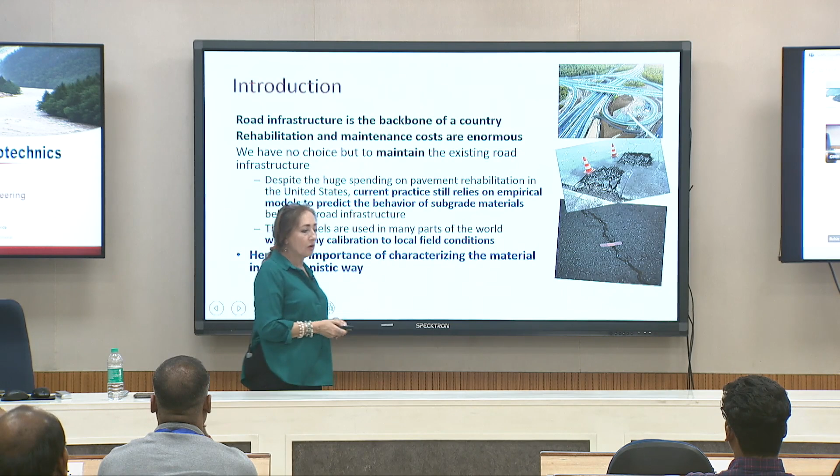We have to spend that money, and despite this huge spending on road rehabilitation, the current practice in the United States and in the whole world relies on very empirical models. Empirical means you may get something fundamental below that, but you get a few points from your area, put a line in there, and use it like it were the holy grail for the whole world. Empirical models for the behavior of subgrade materials are very widely used.

So if you go to the pavement engineering side, where we're trying to do all this geotechnical engineering grade modeling, pavement engineers often don't pay attention to the subgrade. They put a low value there and design for the worst case scenario, the worst case condition. These models are used in many parts of the world, and that's the problem, because once you calibrate a model with certain conditions, everybody else uses it without calibrating for local conditions.

That's a problem, so it's important that we characterize the material in a mechanistic way. What I mean by mechanistic is that it should be a model applicable for everything. Then you get your data and evaluate the model based on your own data, your own soil properties. The fundamental things should be the same for everyone, not just an empirical model.

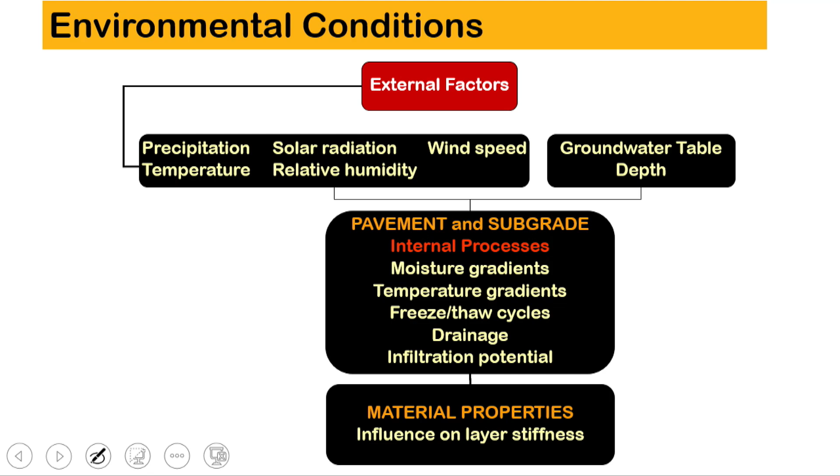So environmental conditions play a very important role in material characterization of stiffness. All these external factors—we talked this morning about precipitation and temperature a little bit, but also solar radiation, relative humidity, which is one of the main factors for suction, and groundwater table depth, wind speed—all of them are external factors that affect the pavement and subgrade conditions.

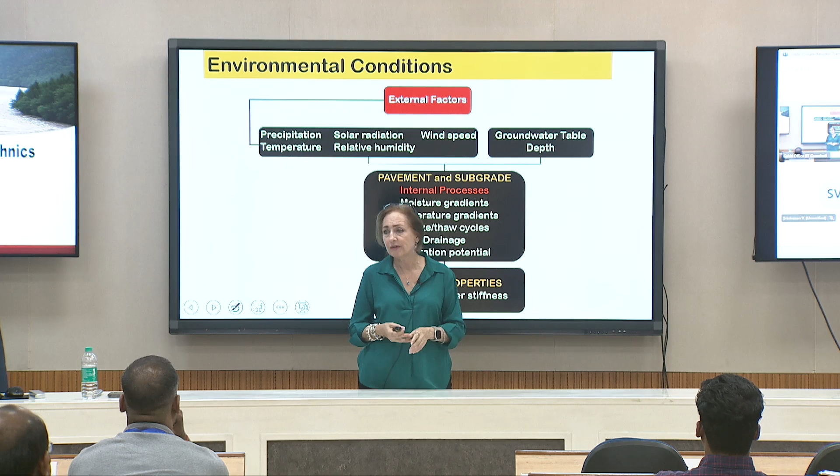All these internal processes that happen in the pavement are a function of some of these environmental conditions, not only the load that you're putting there. So moisture gradients, temperature gradients, freeze and thaw cycles, drainage, infiltration potential—all of them have to do with environmental conditions, and all of them affect the material stiffness of the soil.

It's important. So why is it important for pavement engineering that I take care of the material's stiffness? We put together a climatic model, and that climatic model takes care not only of the moisture variation within the profile, but also the temperature variation.

Temperature is important—probably not for some applications, but for others, when you have freeze and thaw cycles and thermal cracking, temperature becomes a very important mechanism. So temperature distribution within the layers, depth of frost and thaw penetration, freeze and thaw cycles, change in moisture and suction, and the environmental effects you saw this morning, with adjustment to the resilient modulus factor—all affect the main distresses for which we design a pavement system.

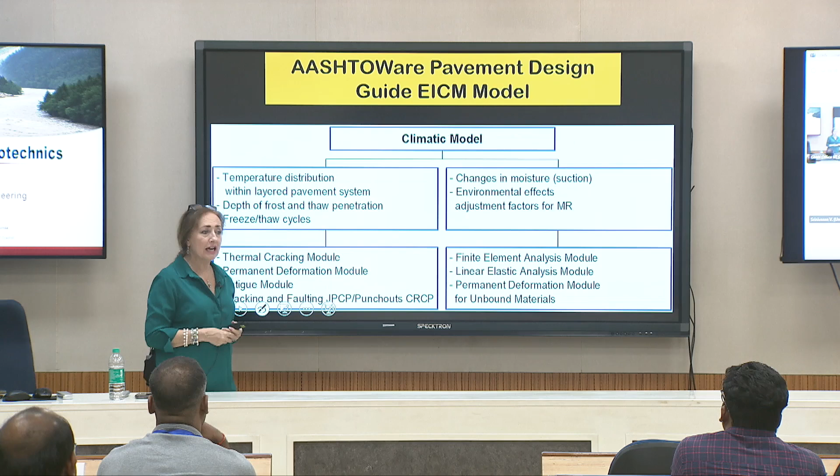I need you to understand that we do have very discrete analysis when we design for bearing capacity for a foundation. We just have a number, right? Or slope stability, we get a factor of safety. Pavement analysis is different. Pavement analysis is a cumulative distress analysis, okay?

The way pavement engineers, and I'm not one of them, do it is basically they figure out what is the rutting or permanent deformation with time and figure out how this thing is going to change, and they put a limit. They say, at this time, my road needs rehabilitation or fails, okay? And same thing for the rutting analysis, they do it for thermal cracking, permanent deformation, fatigue module, cracking and faulting for concrete pavements, and all of this.

So it is a function of time. It's a function of time, okay? And you decide what characteristics you're going to call failure or not. We can do finite element analysis, linear elastic analysis, and we have those permanent deformation module for unbound materials, and all of these are going to be a function of time, okay? And time is going to be a function of your climatic changing conditions, all right?

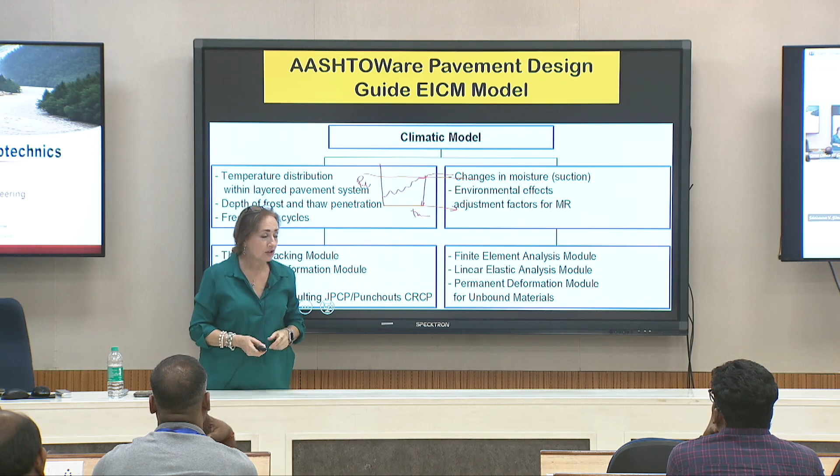So if you have the rutting going like that, the rutting is a function of resilient modulus, right? The resilient modulus is going like that. When you have a lot of rain, your resilient modulus is going to go down. So that thing is going to go down a little bit and run parallel to this one, right? So when you get resilient modulus decrease, you get rutting increase, right? And you're running here.

So all of these will add up with time for the decision that you're going to take, whether it will fail at 18 years or 15 years, right? And all of this is money. So that's how it works. That's a very simplistic approach, but this is how we do pavement analysis and design. On top of that, we add slope stability or road embankment stability and some other factors, but this is basically what we do for pavement analysis and design, okay?

So what we're going to learn today is stiffness characterization, why it's important to be very clear on how to obtain that resilient modulus. I'm going to show you some laboratory testing that we do for that, some field testing, and some empirical correlations if you have a proposal that you have to put together in 3 days, right?

So there are 3 means for determining the resilient modulus: laboratory measurements, field measurements, and empirical correlations. So we're going to go for laboratory testing right now, and basically what you want to do is simulate traffic loading, okay? And the test we do is based on some measurements that Seed from California, Berkeley, I believe, and his group postulated in the 1960s.

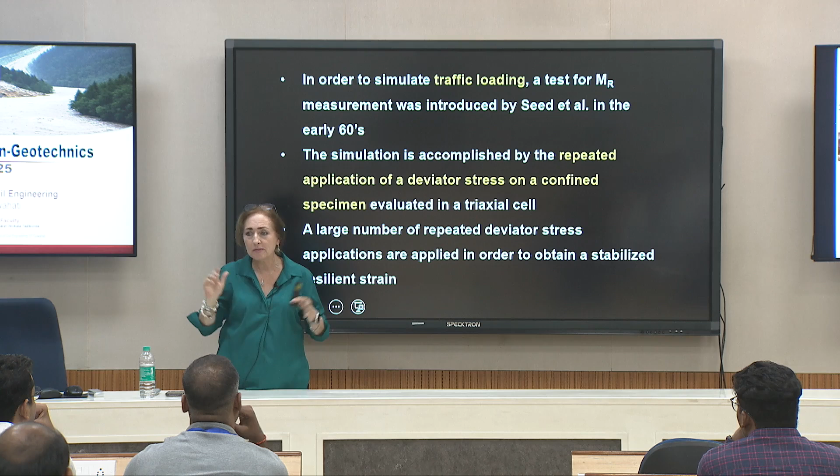That simulation is a repeated application of a deviator stress. Everybody knows deviator stress, sigma 1 minus sigma 3, right? That's put on top of a confined specimen. So we're going to see that in a minute, evaluating in a triaxial cell.

Okay, so you have a large number of repetitions. I'm talking about 10,000 repetitions, right? Each one takes 1 second. In 3 hours you can get the test done. And basically, you change the conditions after a certain number of repetitions. So I'm going to show you how. So this is the test.

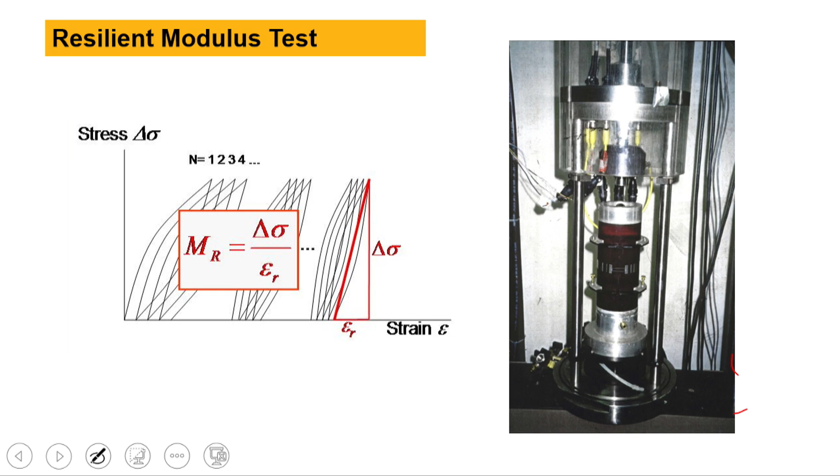So you basically impose, get a triaxial cell, you get a sample. I'm going to talk a little bit about that sample, and basically you put LVDTs to measure vertical deformation and horizontal deformation. And that's why pavement engineers fill these cells with air, not with water. We do it with water, right? But they pour all these LVDTs around for lateral, for horizontal deformation as well, right?

And at that time, probably now there are some submergible LVDTs that are a little bit more expensive, but it's expensive, right? It's expensive to put those. So that's why they confine with air, because they put all these sensors right there.

They start doing loads, low repetition, and do a lot of cycles. Basically, the modulus is your change in stress with respect to the recoverable strain that you get. In other words, you test it, you go up and recover some, you go up and recover some.

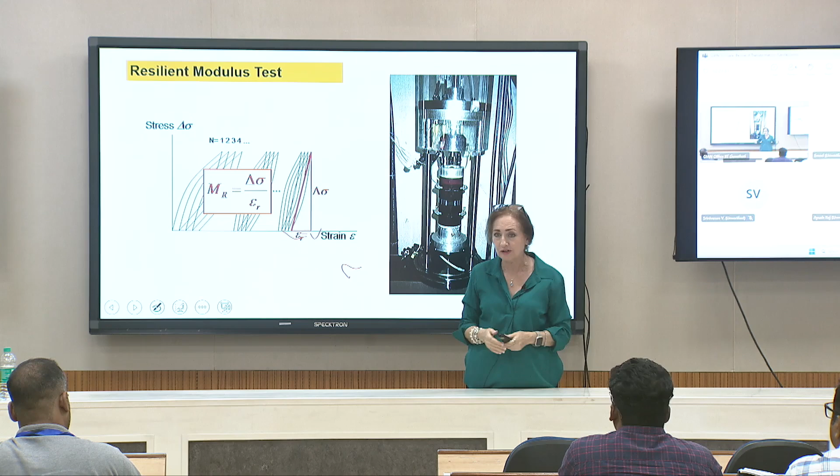After 10,000 repetitions, the soil has equilibrated to that load. On the last 5 repetitions, you measure the recoverable strain, or resilient strain, which is why it's called resilient modulus. You use that recoverable strain to get the resilient modulus for that particular stress condition. Once the strain is measured, the process is repeated.

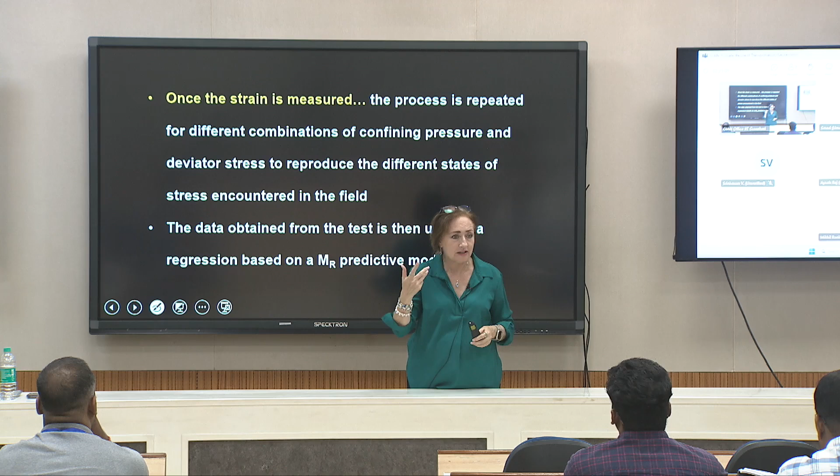The process is repeated for a combination of confining stresses and deviator stresses to reproduce the different stress states of the soil encountered in the field. The data then goes through a regression analysis. You have one confining stress, sigma 3, a deviator stress, sigma 1 minus sigma 3, and you get a resilient modulus. There are probably 28 or 30 different combinations, and you put them into a regression analysis to figure out what your resilient modulus is.

There are two methods that are standard for doing laboratory testing. Have you seen that? Has everybody taken that in undergraduate? Okay, one or two. All right, so there are a couple of test procedures.

One of the most common test procedures used in the United States and in the world is the AASHTO T307. I'm sorry, you may have your own, but I don't have that information. This is called the determination of the resilient modulus of soil and aggregate materials, and it's been used forever.

The latest one is the NCHRP, the National Cooperative Highway Research Program, 1-28A harmonized procedure. I'm going to talk about the 1-28A because I think this is important, and I'll compare it a bit with T307, but I'll be talking about 1-28A since it's essentially the same as the other one.

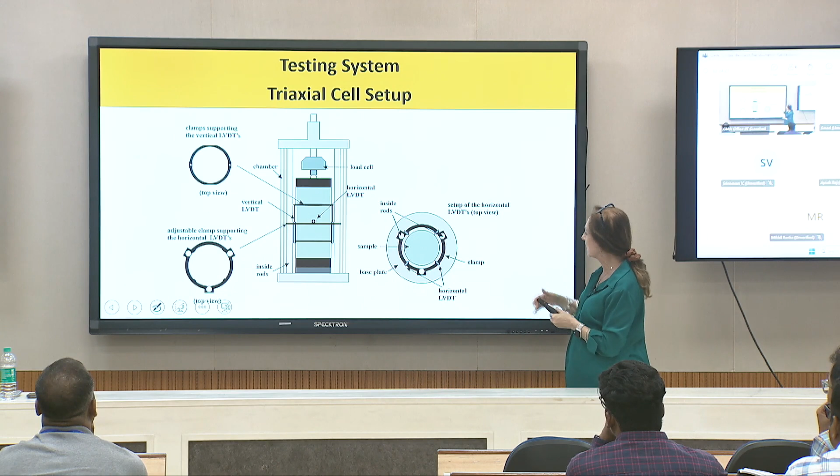So you have the triaxial cell, and like I said, you put your sample in. I'll show you the dimensions in a minute. You put clamps in to position your LVDTs, both horizontal and vertical, and you confine it with air, usually at a particular confining pressure that you need, and then you apply your deviator stress.

For specimen preparation, if you have an aggregate base, for coarse grain materials, you use a sample that's 6 inches, 15 centimeters in diameter, by 12 inches, so it's a big sample. If not, you use the subgrade sample, which is 4 inches, about 10 centimeters, by 8 inches.

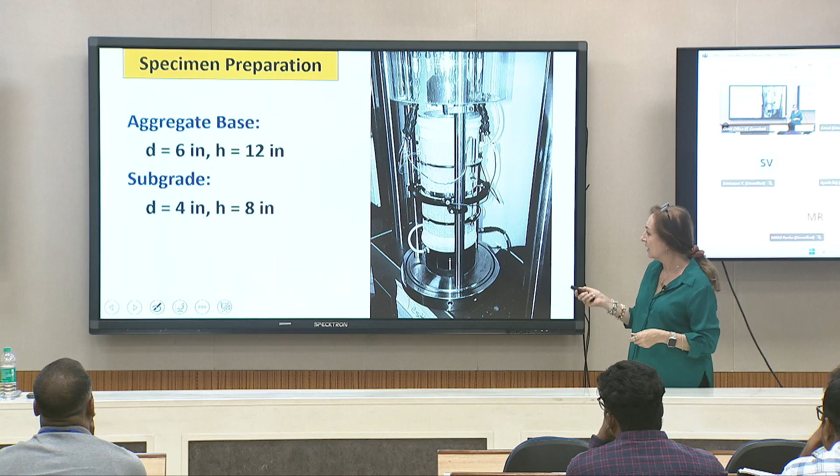So you have to have a couple of loading plates at different sizes, since this equipment has to be manufactured for different sample sizes. Then you put the samples into the assembled triaxial cell.

Then you apply what we call a Haversine load, or Haversine pulse load. When you simulate earthquakes, what kind of load do you use? It's sinusoidal load. For traffic load, we use a Haversine load, which is also a pulse.

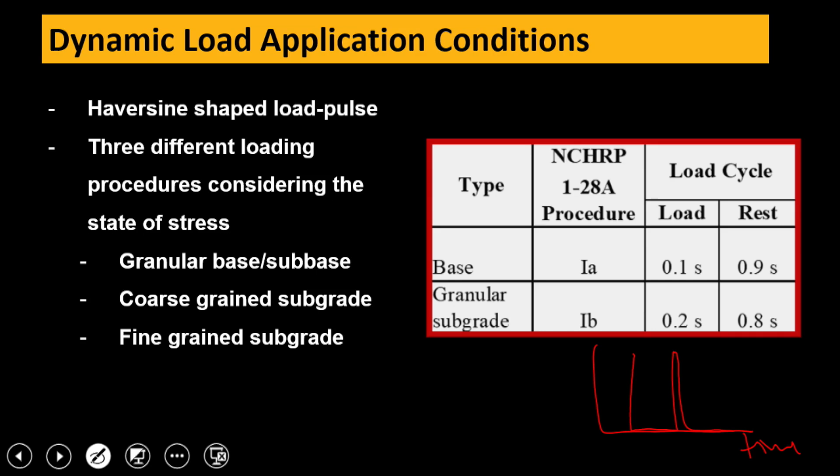There are 3 different load procedures depending on the material you have. You have time on one axis and load on the other. For one pulse you apply load for 0.1 second and rest for 0.9 seconds. If you have granular or subgrade material, you apply load for 0.2 seconds and rest for 0.8 seconds, depending on the material.

This is how we use the Haversine load. You do that once every second for 10,000 repetitions for one load condition, and then you repeat it for another 28 or 30 different conditions, following the sequence of loads.

So how do you choose the sequence of the load? That's very important. You need to minimize the probability of test failure. Why? Because what you want to measure is the resilient modulus of the soil, not permanent deformation, failure, or shear strength. You want to load it to a point where you're not failing the sample, because you're going to have many repetitions on the same sample, so you don't want to fail it.

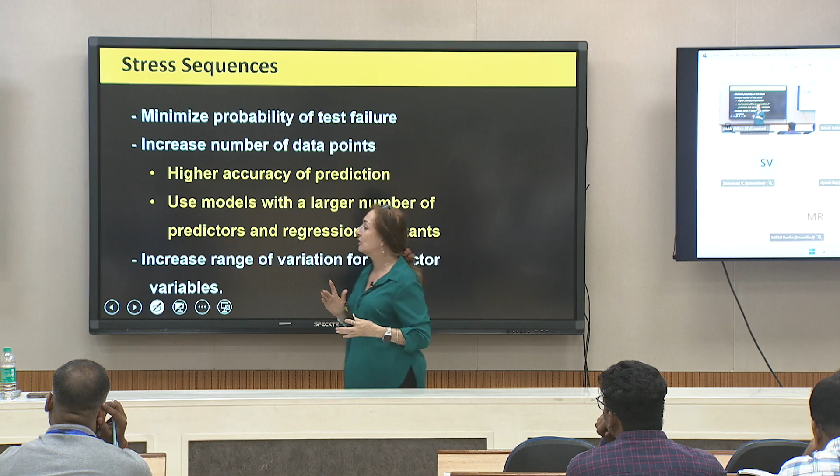So basically, if you check any failure criteria for any soil, that's your failure line for this one.

If you use, for example, the classic approach that we had before, which was the T307, you got a confining pressure in here, and then you start increasing the deviator stress. And you got stress paths that were in this direction.

So what happened is, with the first confining pressure, probably after 5 deviator stresses, you're failing the sample, and you're done. And everybody's calling, why am I failing the sample? Well, because the stress sequence is not the right sequence. You do that for the next confining pressure, and the idea was not to get close to this one, to finalize around here, but you never know what happened with the sample.

So this 1-28A sequence basically uses a harmonized line of constant stress ratio, sigma 1 over sigma 3, which allows you to have this stress path, a little bit more parallel to this. So you are varying in the next sequence not only your confining pressure, but your deviator stress. And that way, you have more loads in here before getting into one that might fail your soil. So this is the sequence that we got.

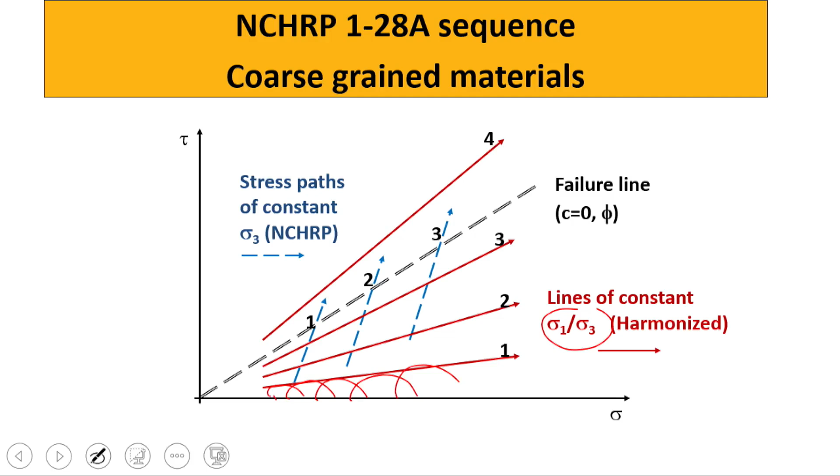And if you have, for example, a fine-grained material, the line of constant deviator stress will do something like that. There were... I thought I took this one out. I'm just afraid that I'm using the wrong one, I hope not. It's too long probably. There are different models.

So you got all this data. You got 28, 30 different sequences, 30 different combinations of loads. And you need to fit this information to a model. Since the 1960s, when Seed proposed this kind of sequence, there have been many researchers trying to find out the best model to represent the resilient modulus conditions. So you then use log models, semi-log, more complicated ones. They use 2 constants, fitting parameters, models all the way to about 6 different constants. They use different predictors, stress state, like bulk stress.

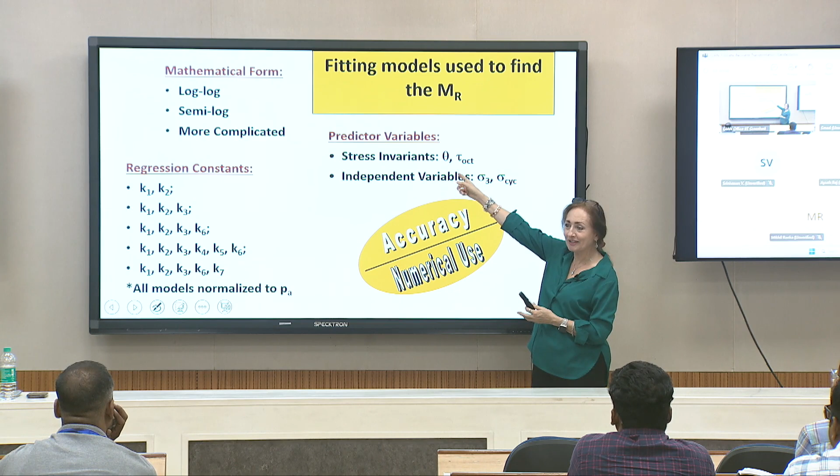And the tau octahedral is 1/3 of the... I think, I hope I remember. Tau octahedral is equal to 1/3 of the square root of the second invariant: sigma 1 minus sigma 2 squared, plus sigma 1 minus sigma 3 squared, plus sigma 2 minus sigma 3 squared. Something like that. So that's the second invariant.

Those are the... so pavement engineering actually uses the three-dimensional thing because they have point loads for these traffic loads. So they use this one, or they use independent variables like confining pressure, cyclic stress. We've been using many, many different models. So which one is the right model? This is just a few of them that I bring in here.

Again, these all have forms in which you include, obviously, the stress, and the response is the resilient modulus, and the K1, K2 are the fitting parameters that are a function of your material properties. So those are many, many models proposed in here. What I want you to see here, very carefully, is to see if you catch the problem with these models.

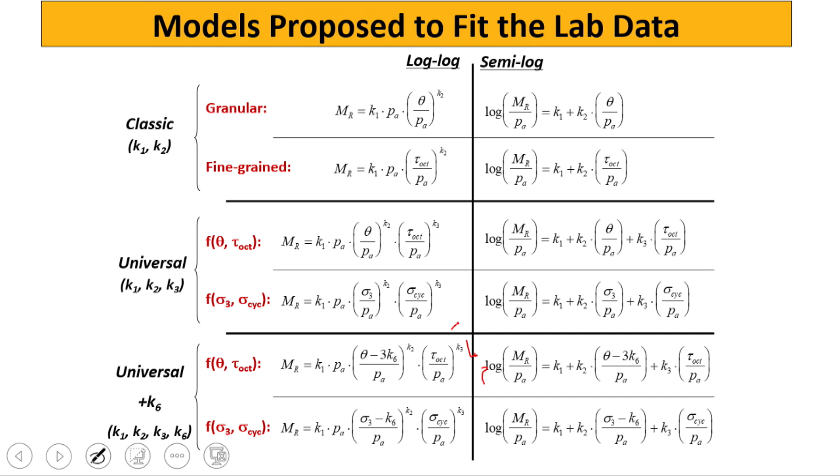So now we get into the more universal models, and now we say, well, we need to include not only the confining stresses but also the shearing stresses. So we got those two in here, and now they're a function of that, and now you have models that are called K1, K2, K3 models, because you got two more variables in there.

And there are models that say, well, this is a total stress analysis, I want something more like an effective stress analysis, in which I include my pore water pressure. So probably it's difficult for people to measure pore water pressure in those tests, but at least I include a factor in here that represents my pore water pressure. So there are models that have been trying to do this, some in log scale, semi-log scale, and so forth. But this has been the sequence of putting together those models to represent the data from the lab.

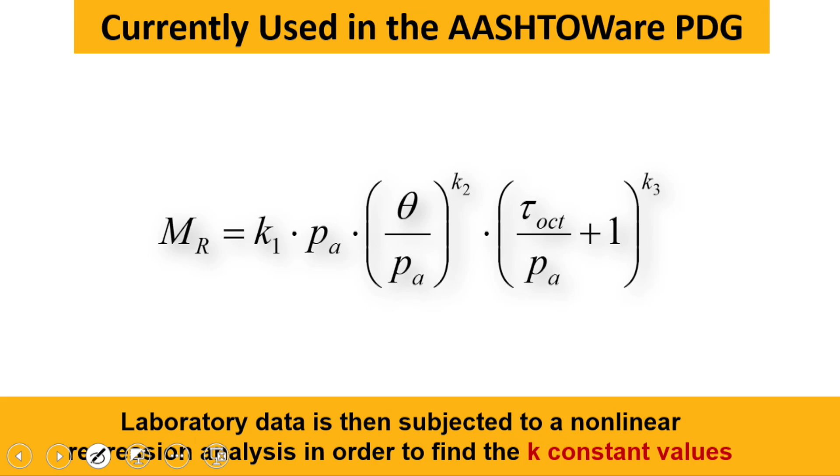This is the currently used model in the AASHTOWare PDG. The laboratory data is now regressed to these values, and your job is to do a linear or nonlinear regression analysis to find K1, K2, and K3 for that particular model, once you have your confining stresses and shearing stresses ready.

So for the K1, K2 model, I'll just bring one example. I have about 10 different examples, but this one is the SEED model, from SEED and Idriss, 1963. When they use the bulk stress, this model doesn't account for shear stresses, as I said.

This one is another model based on deviator stress. This model approach is good for cohesive soils, but at greater depth they don't consider the confining pressure.

For the K1, K2, K3 models, the more common one is the universal model proposed by Witczak and Uzan, and it has both. The P sub A appears in all of these models because it normalizes the stresses, making it easy to model with values from 0 to 1 instead of values all over the place. So all of them use the atmospheric pressure to normalize the stresses of the soil.

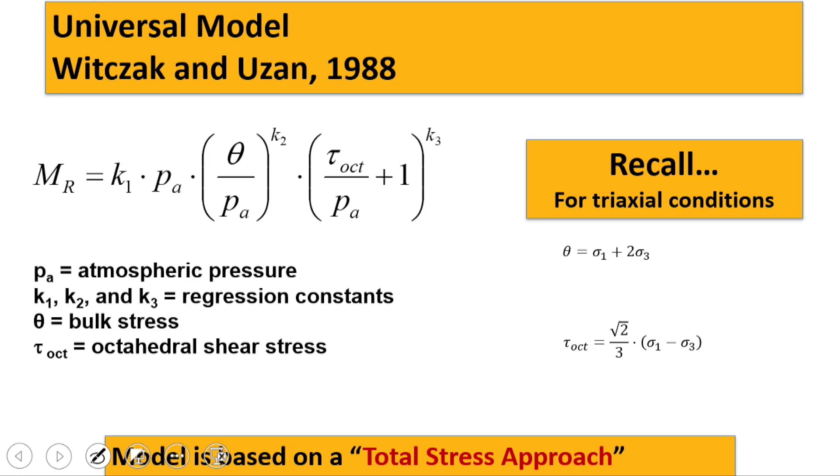This one is the tau octahedral. When you use sigma 2 equal to sigma 3, you default to this equation. I need to check this one.

So I want to talk a bit about what happens with those models: I don't see anywhere that they include suction. And suction is a fundamental stress state variable for the soil. The soil changes moisture content all the time, and suction changes all the time. Why don't we use suction in these models? So these models fail to do that.

I bring in here something I think is important to understand. For example, Harris, 1967, shows the changing resilient modulus based on R value with water content. Look at the big change in water content, it's a huge change. Different compaction conditions also change things, whether you're on the wet or dry side, but these are big changes.

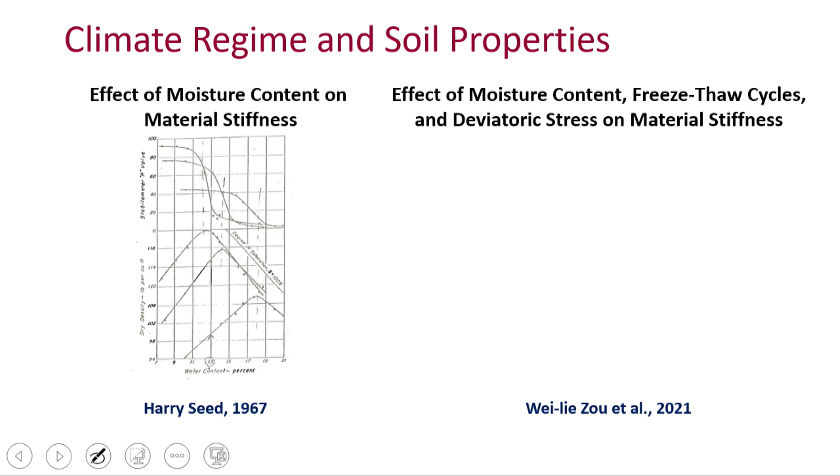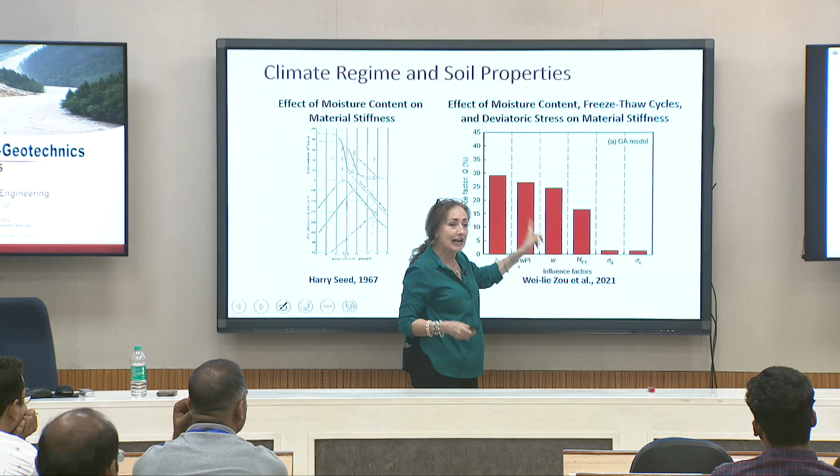There's a paper on the effect of moisture and freeze-thaw cycles and deviator stress on material stiffness from Wei-lie Zou, 2021. He considered important factors across a lot of tests and materials, and found that density is very important. Then soil properties, the WPI I showed this morning, the passing 200 times PI. Then water content combined with the number of traffic repetitions, which he found to be more important than deviator stress or confining pressure by themselves.

But this is very important. If somebody tells me they've been checking water content analysis for a pavement and it's greater in importance than the traffic load analysis, that's something. So it's very important, you need to consider that.

So there need to be some suction-based models available, and there are many suction-based models. This one is from the school of Fredlund, and this graph is well recognized.

Basically, if you have your groundwater table here, I talk about my stress state variables that are fundamental. For a saturated soil, it's my total stress minus pore water pressure, which is your effective stress. For unsaturated soils, we talk about total stress, pore air pressure, and pore water pressure.

You can use the three of them separately, or combine them, which is what we did. We combined them into the net normal stress, which is the total stress minus the pore air pressure, usually zero atmospheric, so that's your total stress basically. And this one is your matric suction, which you're now very familiar with, pore air pressure minus pore water pressure.

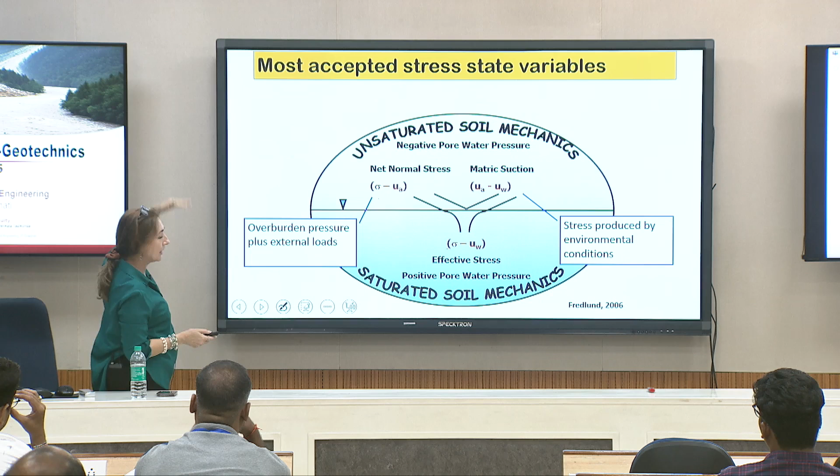So those are the stress fundamental variables for unsaturated soil mechanics, or the negative pore pressure above unsaturated soils. Based on that, a lot of the models you've seen include mostly total stress analysis, when you have only sigma 1, sigma 2, and sigma 3 total.

When you get into saturated soils, you don't have any suction, right? The only thing you have is your effective stress: sigma 1 minus u water, which is your sigma 1 prime, sigma 2 prime, and sigma 3 prime. The effective stress for that.

When you jump into unsaturated soils, you're going to have not only your net normal stress, but also your suction applied to the three phases, all right? So this is the stress state that we deal with in any unsaturated soil.

For triaxial conditions, sigma 2 equals sigma 3, and then you just get into your total stress analysis. You have your equations in terms of total stress. For the saturated case, you get it in terms of effective stress, which is 3 times your pore water pressure.

Because you have sigma 1, sigma 2, and sigma 3, that's the tau octahedral for that, which is the same shear stresses. Whether you have water or not, you're going to have the same stresses, right?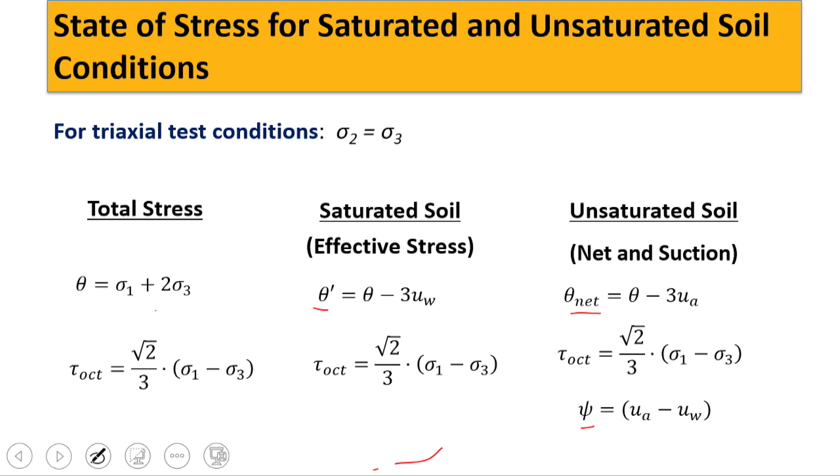So methods that incorporate suction, I found many, but I divided them into 3 different categories. One of them uses the effective stress from unsaturated soils, okay, which I don't like at all. I'm from the school of, I don't like effective stress for unsaturated.

I hope I convinced you that the suction is independent, right? It's independent of your externally applied loading, it's the environmental load.

So Bishop proposed a model for that, very empirical in nature and very popular. This is the first model people started using, but it's inaccurate for degrees of saturation less than 85. So you can use it, probably good for saturation more than 85, but it's attractive for implementation processes. This is the model by Bishop, and it's very close to effective stress.

You have your net normal stress in here, like your total stress, plus your suction value multiplied by the famous Bishop chi parameter. That chi parameter is a function of degree of saturation. So now we have a material property that should be independent, but it's also a function of suction, which you have here, so it doesn't make sense. Because you have now a soil property that is a function of the stress that is represented, right?

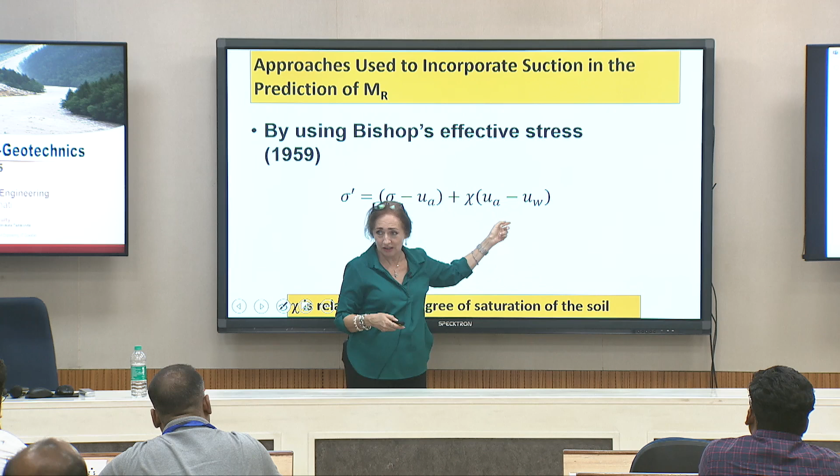Should be independent. So I don't like it, but Bishop's model is good because, let's say for example you are teaching bearing capacity, for those who are in academia now, and you have a soil profile here with your groundwater table, and you ask the students to draw a pore water pressure profile in here, right?

And what the undergraduates are going to do is draw this one and zero here, right? That's your pore water pressure profile. Bishop analysis, because of that, is going to allow you that the pore water pressure has a certain value in there, right?

So with this, the pore water pressure, you can create a confining pressure and effective stress, like before it was effective stress, probably something like that, and then it just jumps lower because of the pore water pressure, but now you're going to have a little bit more because you have the suction value right there. So it's easy to implement, it's easy to show them that the effective stress will increase a little bit because of that chi parameter and suction parameter.

Second model, the second way of doing it, is a factor that considers matric suction independent of the contribution of the applied pressure, and that's what we saw this morning: resilient modulus at optimum condition plus an environmental effect, right?

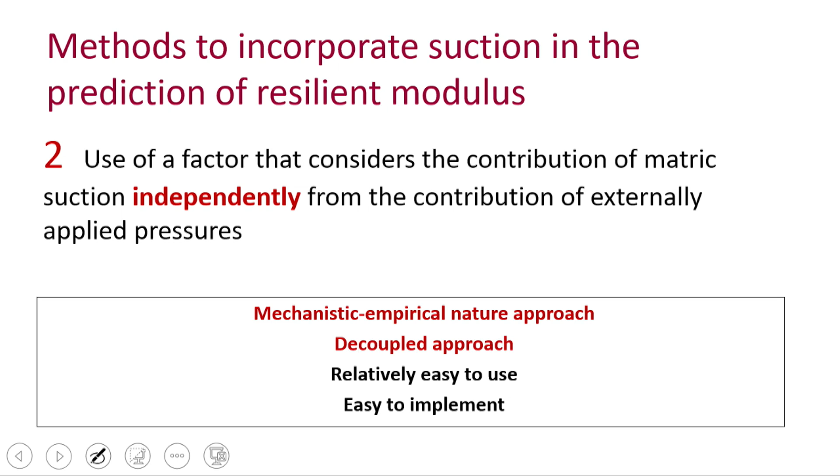That's going to be your tutorial in here to figure that out. And it's mechanistic in nature because it includes now the two stresses: the externally applied loads and the environmental loads. It's a decoupled approach, and I put in red what I think is not that good, but it's relatively easy to use and easy to implement.

That's the one being used in the Mechanistic-Empirical Pavement Design Guide in the United States. We use the Witczak model. These are the total and octahedral external loads, and the environmental factor, as you saw, represents the factor related to the environmental conditions, right?

The third model is more fundamental, and it says, well, why don't we include the suction in the laboratory testing, right? Why not?

We can put a triaxial cell and actually measure pore air pressure and pore water pressure. Or we can put the sample at a moisture content, and then you have your soil water characteristic curve and know what your suction is. So why don't we do that? Well, the apparatus is a little bit expensive if you want to measure pore air and pore water pressure.

The triaxial cell sells right now for about $150,000. But nonetheless, you still have a way to do a surrogate, like with water content, and figure out what the suction value is. We've done a lot of work on this one.

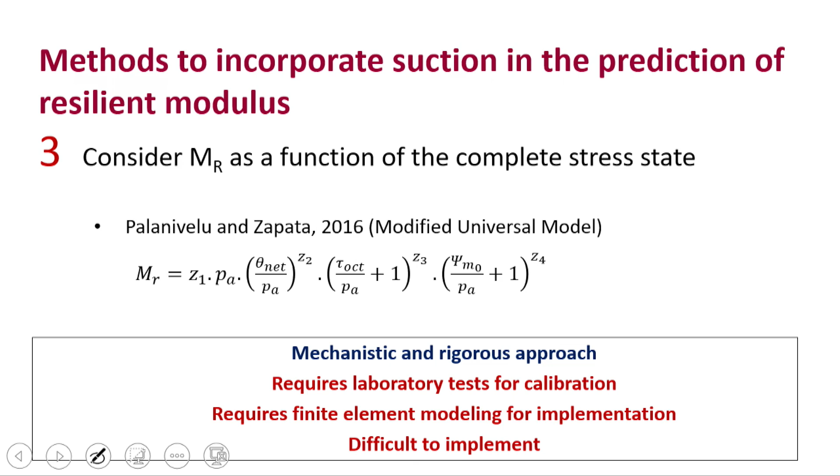Now what you need is to do a regression analysis to find the 4 parameters. You're going to need a suction column, but I hope for you it's not that difficult to get that suction column in there. So this one is rigorous and mechanistic. Obviously it requires laboratory testing for calibration because you need K1, K2, K3, K4. But it requires finite element modeling because that value changes with time, and it's difficult to implement.

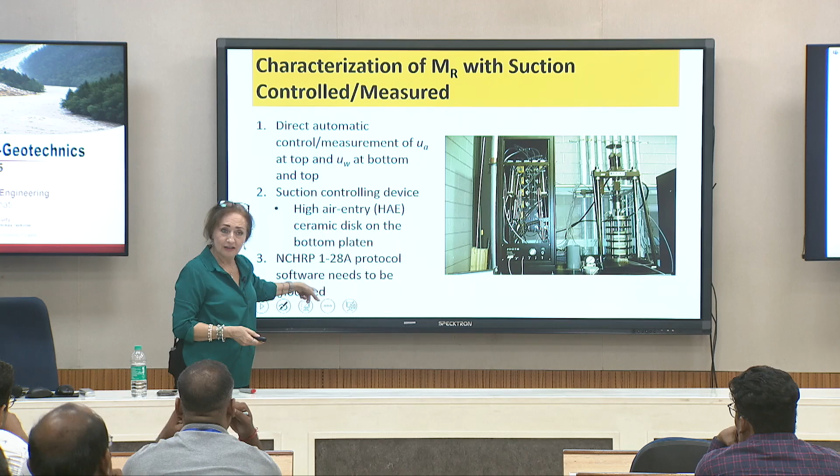How do you get K1, K2, K3 if you don't have laboratory testing equipment like that? Probably some of my practitioners here will be very interested to hear that. There is some data that was used - I think Rahul was talking about the LTPP, the long-term pavement performance test.

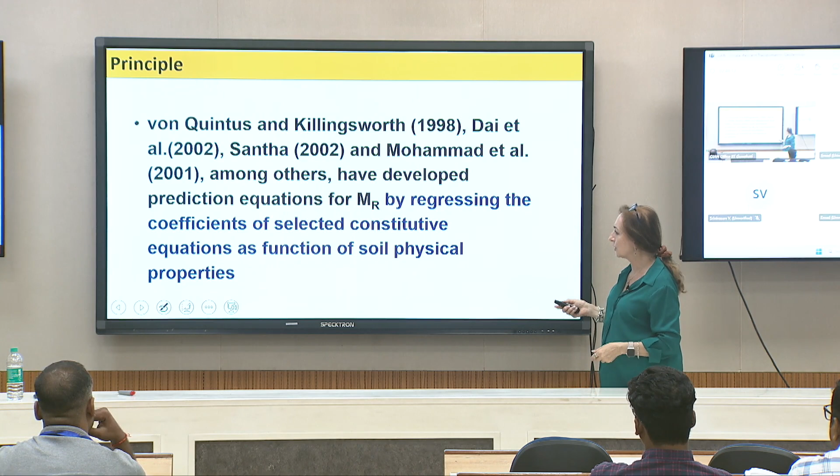This data is available for everyone to download. It's a big database from the pavement engineering groups in the United States, and it has so many sections all over the country. The nice thing about this one is they do have resilient modulus measurements in the laboratory. So you can get the data - this is what von Quintus did in 1998, and some other people did - they have regression coefficients for selected constitutive equations. They use the universal model mostly, for different soil physical parameters.

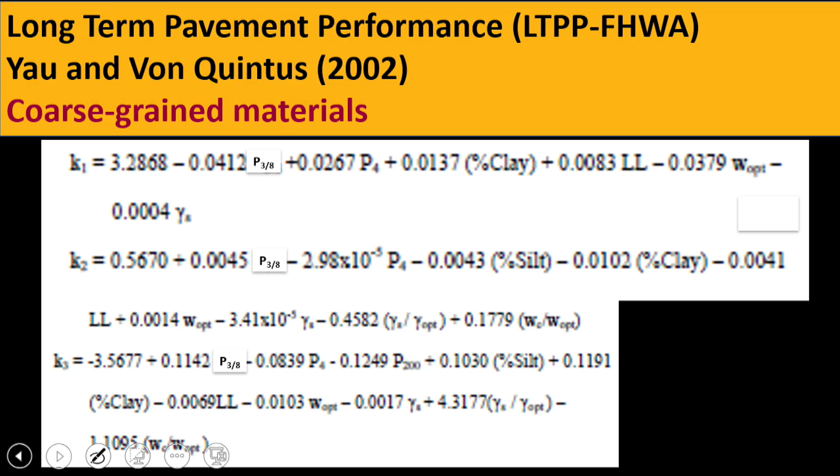So they got all this database, resilient modulus, K1, K2, K3 from the laboratory. They got soil parameters: PI, Atterberg limits, passing 200, density, water contents. And basically what they did is they used that, this is the universal model, and they put together empirical values for K1, K2, K3. Based on what? Passing 3/8, passing 4, percent clay, liquid limit, optimal moisture content, and so forth.

This one is for coarse grain materials, so they use compaction characteristics. For silty and fine grain material, they use percent clay, PI, water content. And for fine grain soils, they use more parameters for K2.

So they do have, of course, this is now empirical. You need to be careful because you're going to be using soils that were not used for the calibration, so you need to be a little bit more careful on that. But there are, like this, I can show you 10 different papers on different calibrations for that. So there are ways to use the K1, K2, K3 models for that.

Okay, so this is what I got for laboratory tests. I hope you understand how we get the famous resilient modulus here, and how we can modify those results to include suction values, which I think is important.

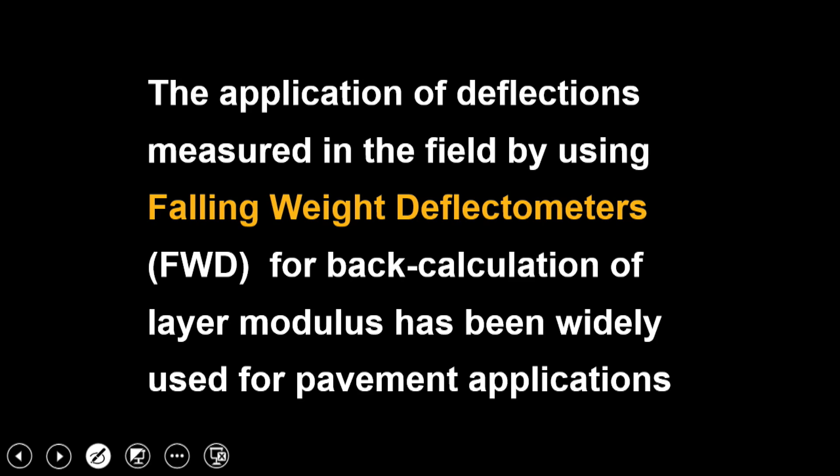Field testing, I'm going to go quickly on that. We use the application of deflections. Anybody of you have done falling weight deflectometer? A few, two, three, okay. This is the test we do: the falling weight deflectometer.

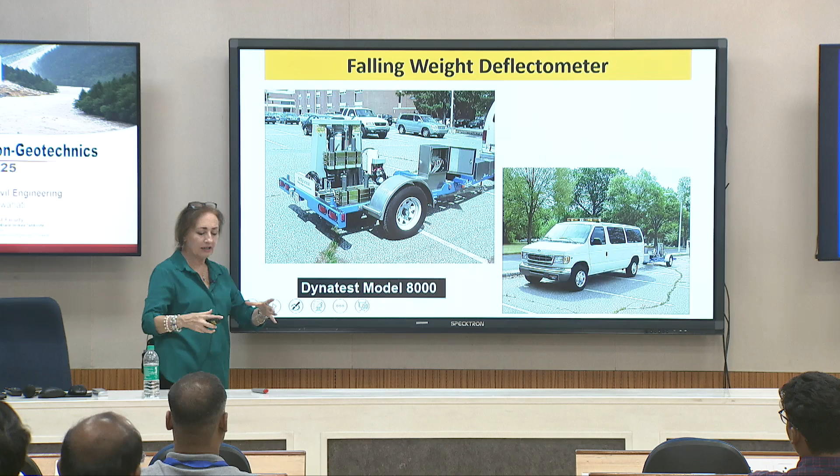Basically, what we do is use that device. It's a non-destructive test, and it has a loading plate. This is the little cart, and you've got the plate here down. Depending on the size, I think it's 15, 20, or 30 centimeters. The lightweight version is less than that.

And you have the load, and you apply the load to this one, and then you just go and apply loads on that. Every time you apply a load, you're going to have a deflection basin.

So here, this is a drop in weight from a predetermined height onto a loading plate with a diameter of 30 centimeters. The magnitude of the load is important because this is how you estimate the stress. The load you're putting in can vary by changing the mass and the height of the drop.

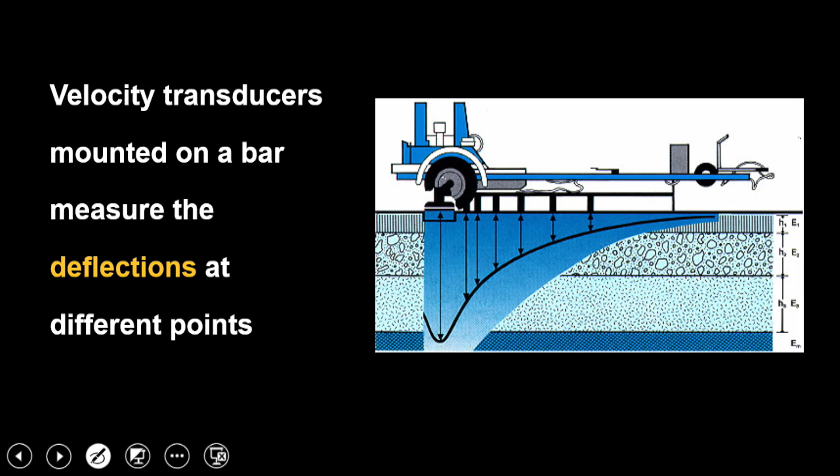Based on that, you also install velocity transducers in a beam, mounted in a bar, and they measure the deflections that occur when you apply the load. Obviously, the farther you get from the point where you apply the load, the less deflection you have. This is what we call a basin, a deflection basin.

And if you can see, you can get that deflection basin into a model, or into a function.

Once those deflection measurements are taken, you know the layers. You have to go to the field. You need to figure out the density of every layer, and the height of every layer.

Basically, what the program does is back-calculate what the resilient modulus might be by exactly matching what you observe in the field, the deflection you observe, with the deflection you get using the resilient modulus, to get exactly that deflection basin. That's what we call a back calculation.

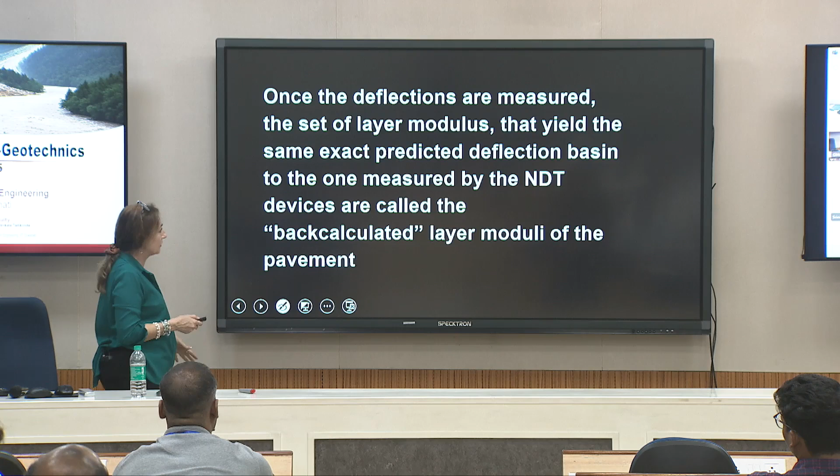Back calculation of layer moduli of the pavement. Again, there's a whole lecture on all the equations we use for that, which I'm not bringing in here. We also have portable falling weight deflectometers that are smaller in size. They're a standard size, but they're also very affordable to get.

So what are you getting after that? Usually the influence depth is approximately 1 to 1.5 times. So if you have less than that, you're going to have composite deflection. I'm not going to get into those details.

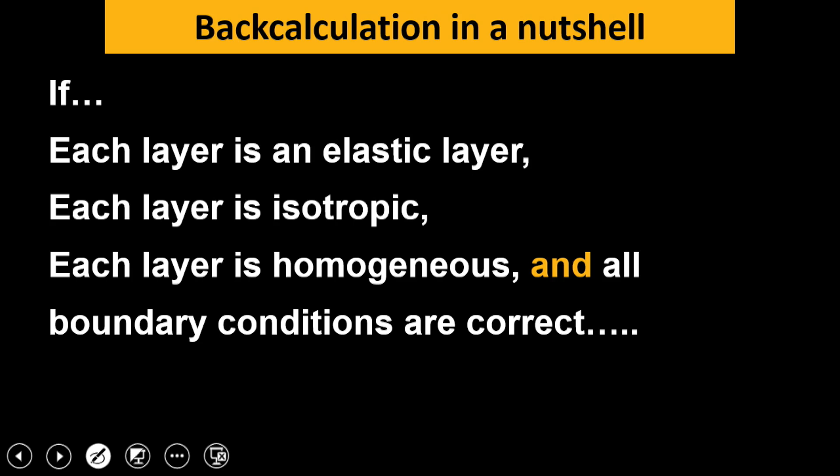But back calculation, in a nutshell, assumes each layer is an elastic layer, that's mistake number one. If you have clays, they're not elastic, they're elastoplastic, but you consider them elastic in theory. You consider each layer is isotropic, has the same properties, is homogeneous, and that all boundary conditions are correct. So you do have a lot of assumptions.

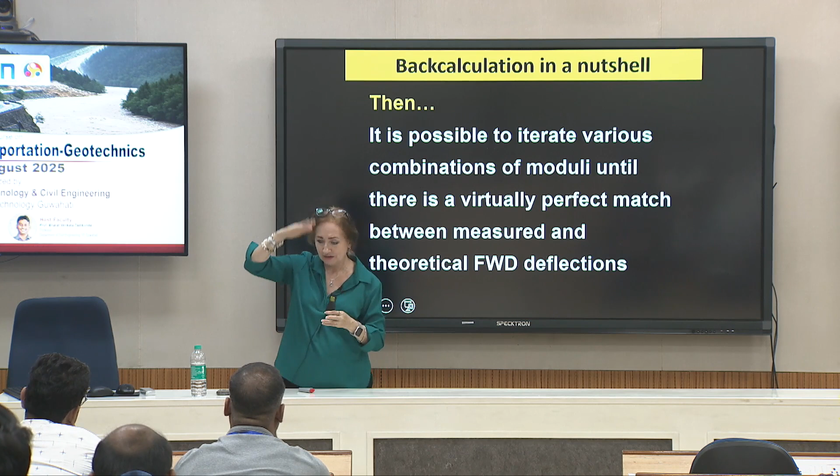But it is possible to iterate various combinations of moduli until you get a match. It all depends on what values you start with. Those who model will see that the initial input parameters are very important, because when you're getting more than three layers, it becomes very difficult to do.

So you do several iterations until you find a perfect match between the theoretical and the measured falling weight deflectometer measurements.

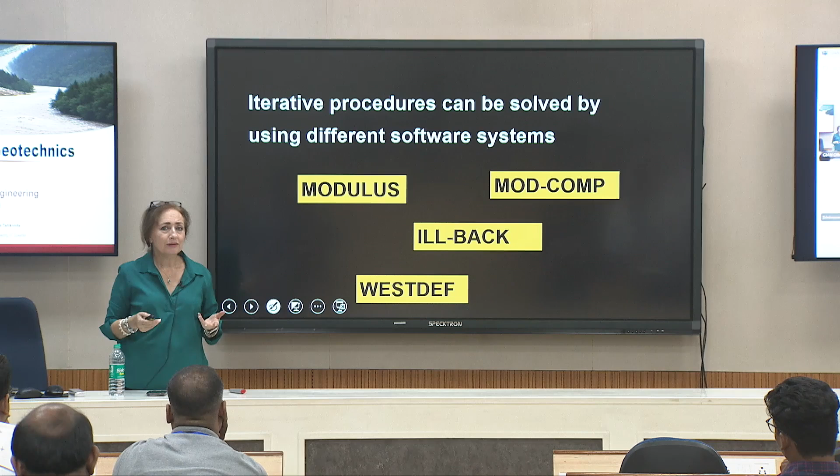This is obviously field testing, which is much faster to obtain many data points. But you also have to deal with the variability of the system, and you need experience to get these basins very well measured. So I'd say this is more like an art than a science. Nevertheless, this is what we use all the time, the falling weight deflectometer, to measure resilient modulus in the field.

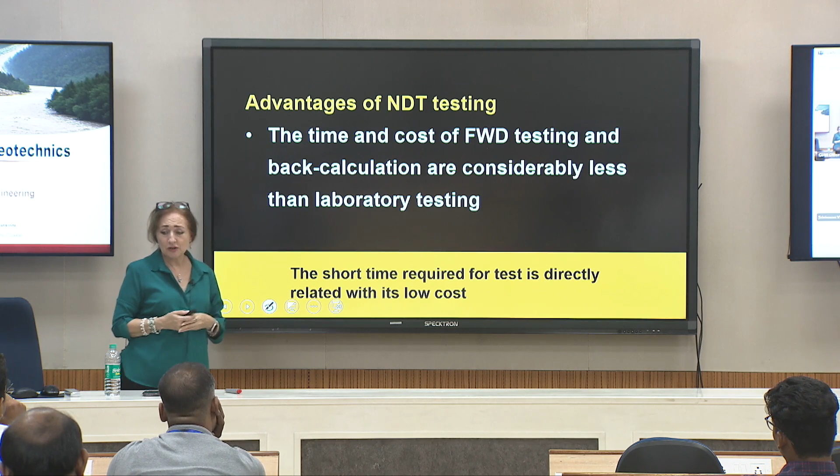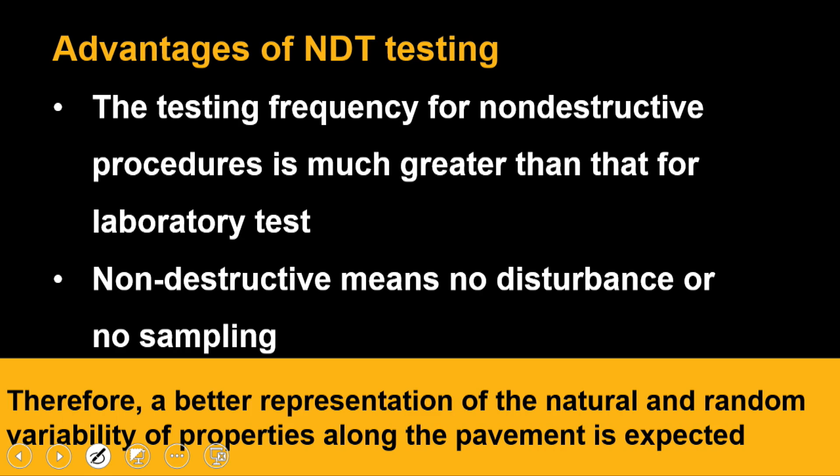This is very good because it's non-destructive. There are advantages for that: the time and cost are much less than laboratory testing, because you can do a lot more tests in a little amount of time. Non-destructive means no disturbance or sampling, so you get a lot more for the buck. The disadvantage is you cannot control the changes in density or moisture content in the field, and the approach is linear elastic theory, which doesn't apply for all soils.

So this is the second way to get the resilient modulus, when you don't have laboratory testing or field testing, but you need some data. So we jump into empirical correlations. These are to be used with care, for preliminary analysis. Estimation of resilient modulus is of interest when you don't have time, when you're doing a proposal and need numbers quickly for the design, or you don't have the money, or it's a small project.

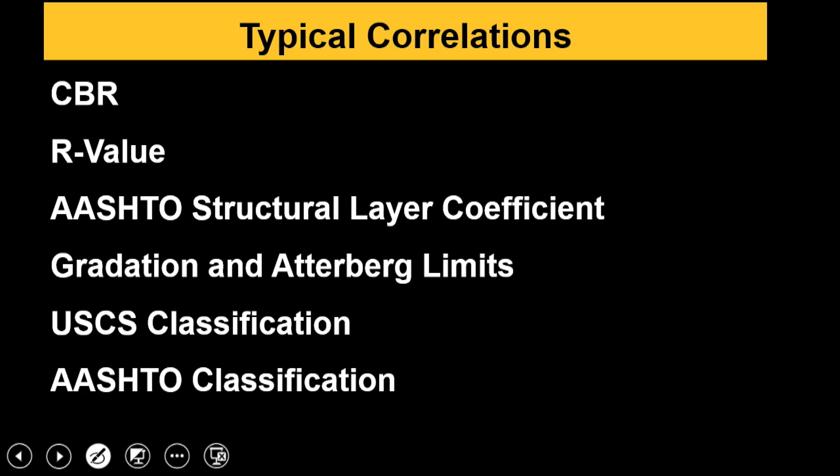There are typical correlations, and probably you recognize some of these. CBR, California Bearing Ratio, is the most famous, used all over the world including the United States. Half of the United States or more use CBR instead of resilient modulus. Other values, the structural layer coefficient, use grain size and Atterberg limits, soil properties for that, even classification, to just get a number. CBR values are probably the most important, and this is what design practice in engineering uses all the time.

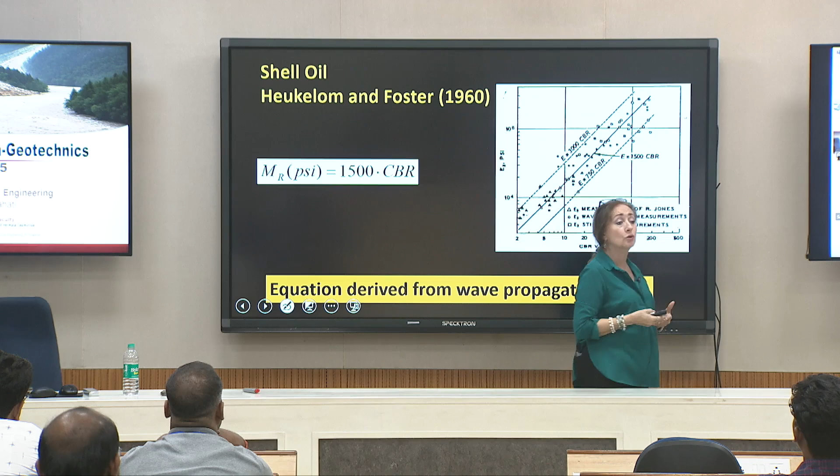They use CBR. The California Bearing Ratio test involves putting material in a mold and testing the deflection or deformation at different loading categories. It's a measure of strength, not a measure of resilience. It's not something dynamic, it's a static test. That's why I don't like it, okay? It's a static test.

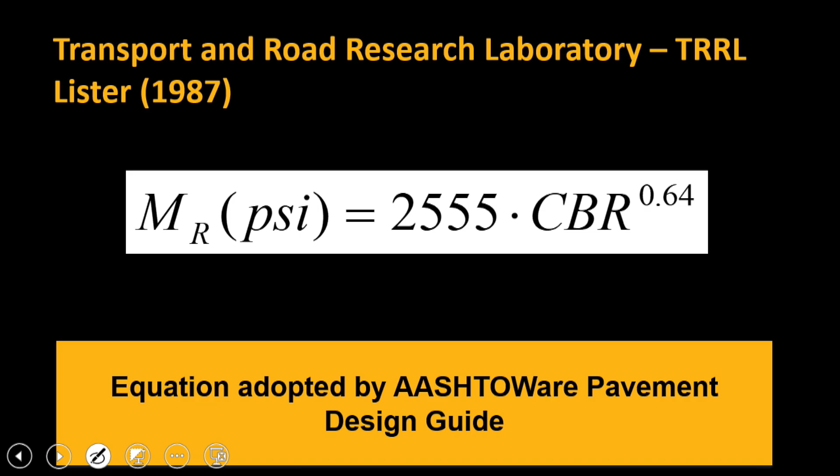This one is the TRRL, the Transport and Road Research Laboratory, and perhaps this is the best equation I've seen: 2555 CBR to the 0.64. That was adopted in the AASHTOWare Pavement Design Guide. When you put in the guide a CBR value instead of a resilient modulus, that's the equation the program will use.

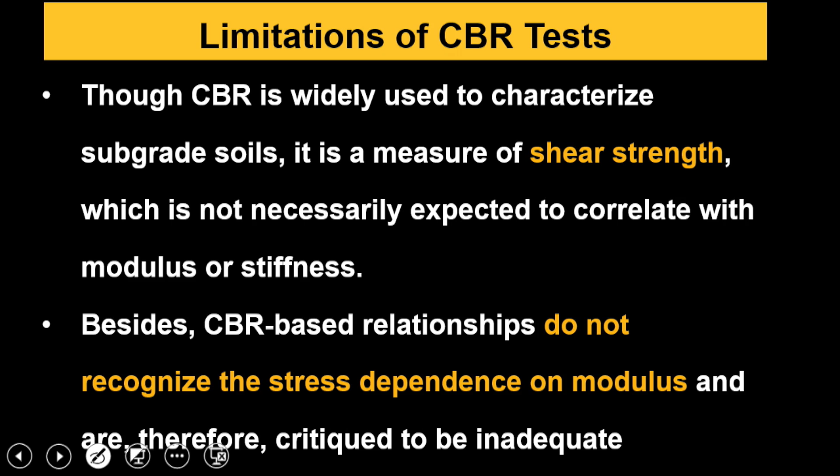There are limitations, and I want to bring that out, I always found this in pavement engineering. CBR is an easy thing, like Terzaghi's saturated condition, it's been there forever, so everybody thinks it's the best thing to do. It's not, okay, it's not. It's widely used, so there's a lot of data, but it's a measure of shear strength. We're talking about resilience, and I've talked about the importance of not failing the soil, yet here they're failing the soil to get that value for resiliency. So I don't understand that. It's not correct.

Besides, CBR is based on, does not recognize the stress dependency on modulus as you increase the loads, and therefore I critique this to be inadequate. But a lot of people use it, have to bring it in here because that's the first thing you're going to be looking at when you get into the practice.

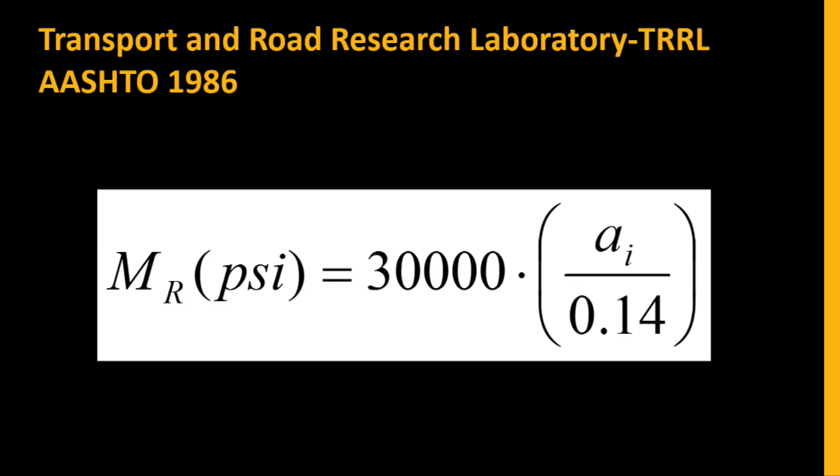Correlation with soil index properties, very good for us because it's easy to get passing 200 and PI, right? And DCP, dynamic cone penetrometer, because we use a lot of data in the field for that. So there are equations for that as well. This one is correlation, the CBR with the soil index properties, and then you use the CBR to get resilient modulus.

This one is actually the best we were able to do for the coarse grain materials. This is in the design guide. And this one is for fine grain materials also, a function of WPI.

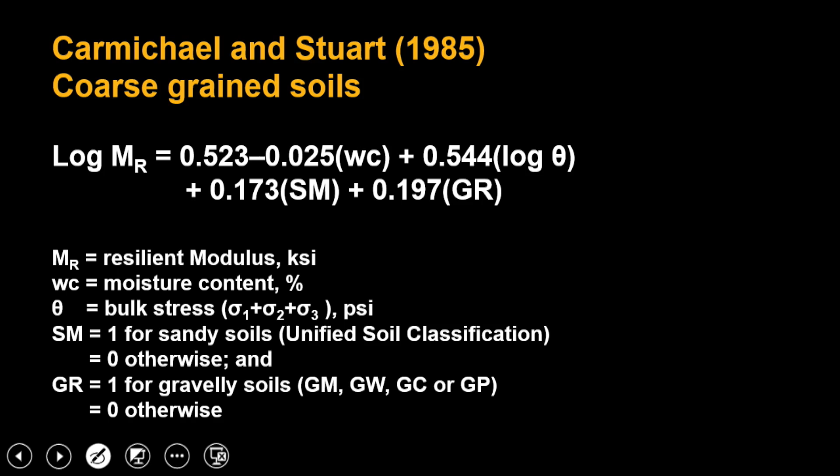Empirical correlation, when you include also index properties plus the stress, you mix them and do a big regression analysis. It's easy to do regression analysis. You include in here water content, bulk stress, a value that depends on the soil type, and the GR is a value for gravelly soils in here, okay?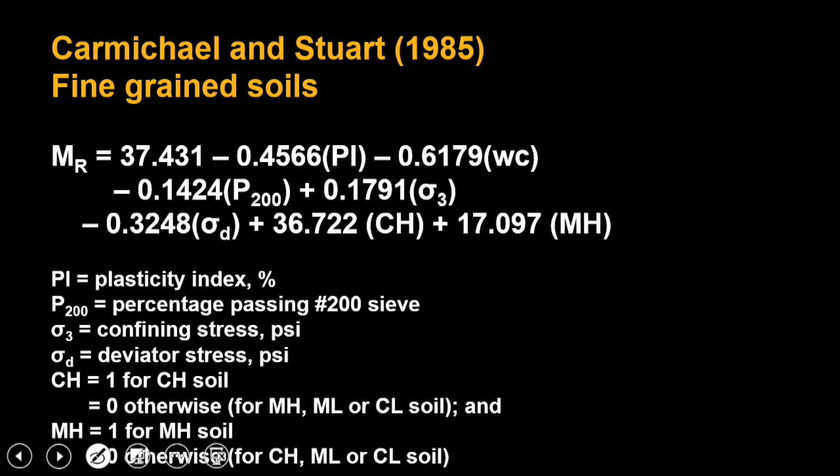Very empirical, right? Every time you see a number like 0.5, 2, 3, 4, think it's empirical, right? It's not fundamental, mechanistic. So be careful with that. Those were created for a particular set of conditions, all right? But they're available. Coarse grain materials, fine grain materials, a function of PI, water content, sigma 3 confining pressure and deviator stress are there.

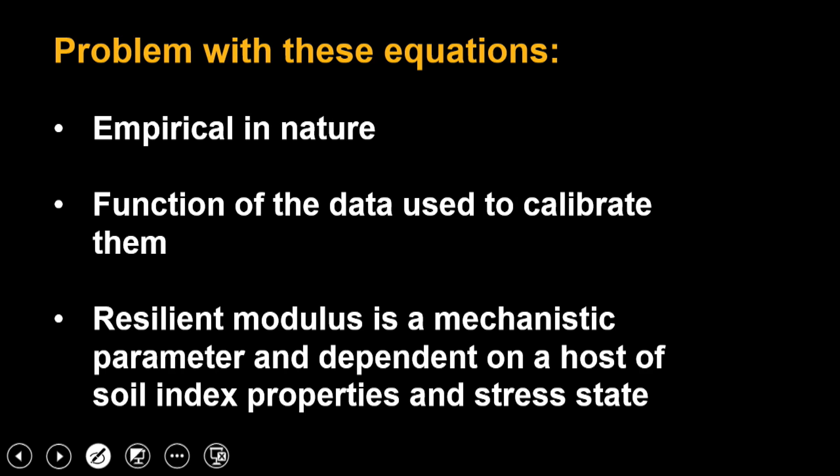Problem with these equations that are empirical in nature, they're a function of the data that is used to calibrate them, okay? You need to treat them with at least some of the data that you got. And the resilient modulus, again, is a mechanistic parameter and depends on soil index properties and also the stress state of the soil. So that's what I got for resilient moduli. I hope you got a very good idea of how to measure that in laboratory, field, or some empirical conditions, empirical correlations you still can use for that.

Drainage considerations, I think this is very important because the whole thing about this is about the water, right? If you can control the water, then you can control probably many of these changes in the stress state, and therefore changes in resilient modulus that are undesirable.

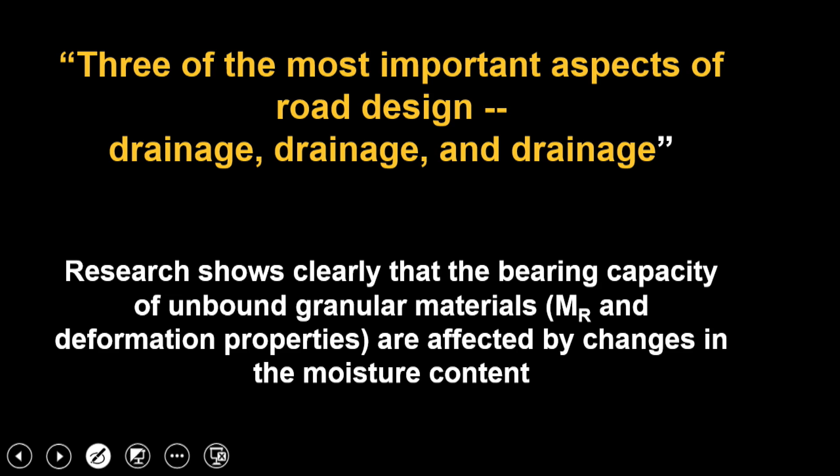I'm sorry, I didn't bring the reference in here, but I got it at the end. Saarenketo said 3 of the most important aspects of road design are drainage, drainage, and drainage. If you take the water out, if you control the water out, then you're going to be controlling many of these things, right? So it clearly shows that the bearing capacity of any unbound granular material is affected by changes in moisture content. I hope we convinced you of that in the last 3 days.

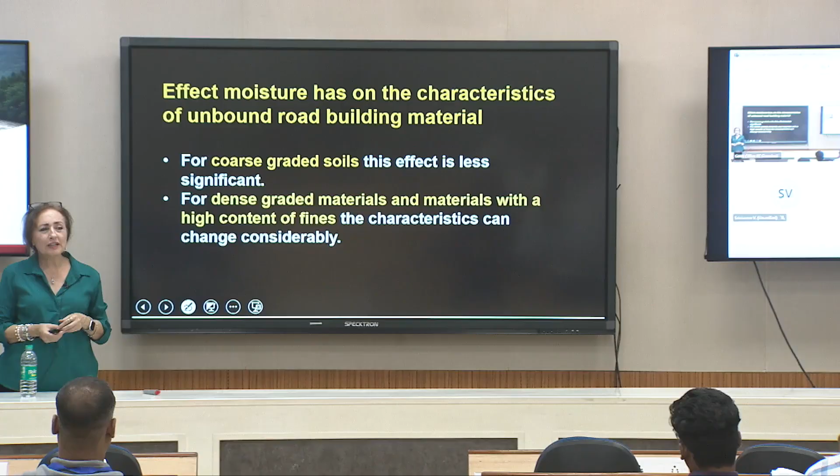For coarse grain material, because you have more drainable conditions, the effect is less significant. The change in resilient modulus is less, actually. But when you have dense graded material, remember when you saw the granular material, I was talking about an environmental factor of 2, but when you have a dense graded material, then you do have more changes, more considerable changes.

Why do we use drainage in the subgrade? Well, we want to lower the groundwater table level close to this one. You want the water away from your infrastructure, to intercept lateral flow of the subsurface water beneath the pavement structure, and to remove water that infiltrates on the pavement surface.

The biggest problem is when we have a slope, a road section on sloping hills. Professor Barat showed you many examples in the first lecture on how this is affecting not only regionally but all the world.

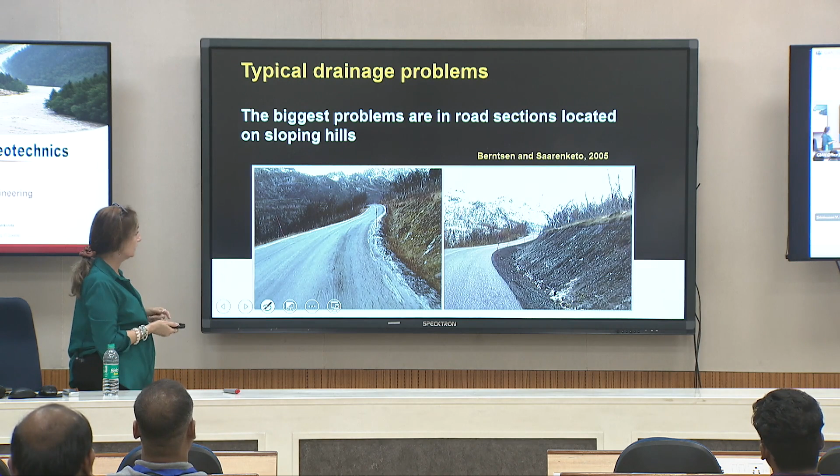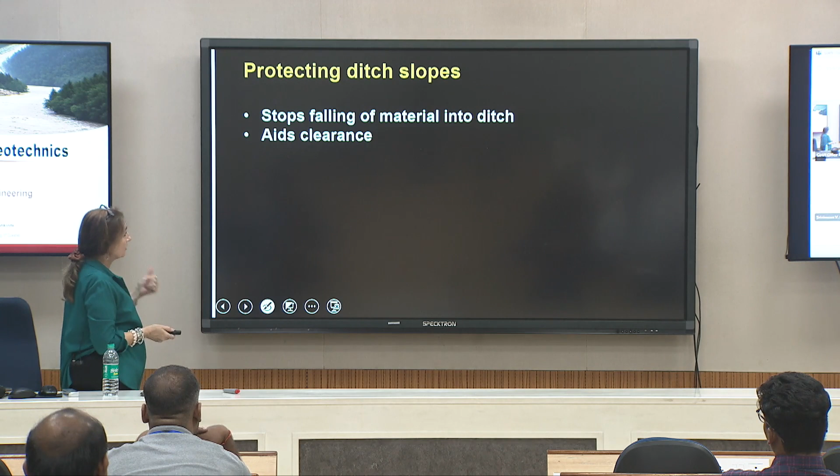Protecting ditches is probably very important, and I think this is the best thing. Although we were discussing last night over dinner that it's almost impossible to maintain all the ditches in a town, in a place. So it's difficult, but stop the falling of material into the ditch, aid the clearance, everything. All these ditches should be clear of any debris. This is the first thing you need to teach.

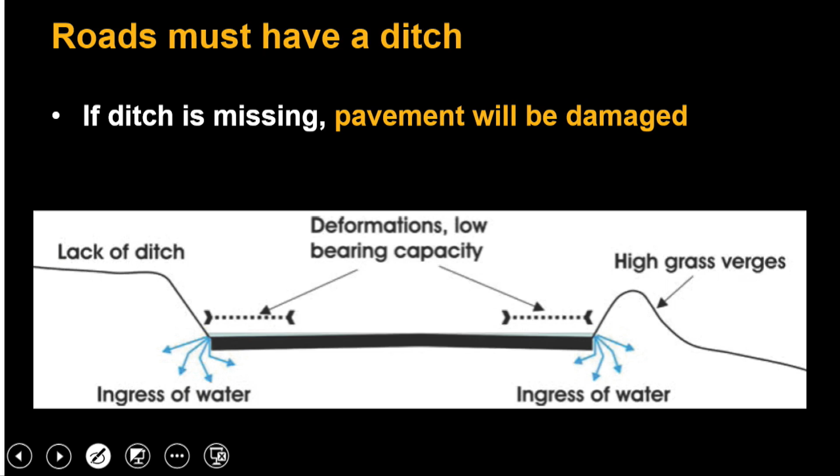Let's say a soil that changes volume, like we're going to see next, or a soil that's compressible, you don't want water in there. Or simply you're putting water on top of the pavement, creating potholes and all the stuff you don't want to happen.

So surface drainage control is important. You can do it in different ways, like a crown section, trying to do that, or a slope, basically getting the slope in such a way that you get the water out.

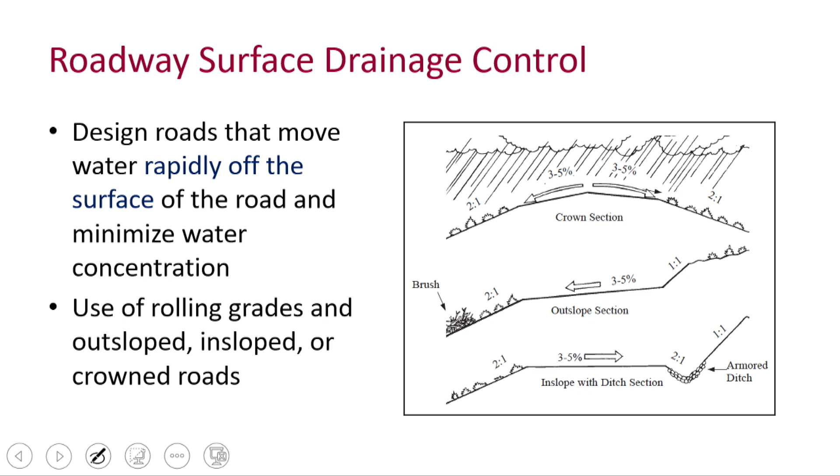For this kind of design, you need to make sure you put the water in a safe place, because sometimes you do that without taking care of this side, and basically you're creating something down the slope, or in a slope with a ditch.

Rolling grades are also important. You get these low volume roads, and this is an unpaved road. Basically what they do is a rolling dip that is lower than the road. Obviously not good for high speed roads, no more than 20 to 50 kilometers per hour.

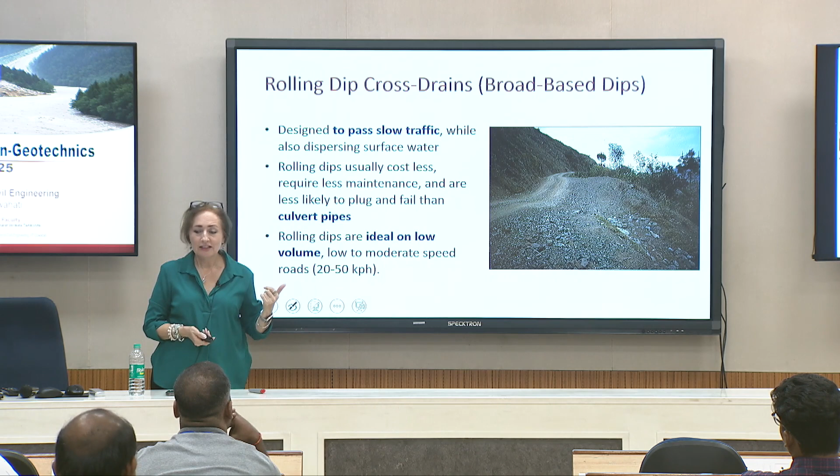But they make this, and then also on a slope going down, they cover that slope with some material that doesn't let the fines out of it. This seems to be working pretty well, and is much cheaper than a culvert. Culvert is basically the best thing to do to protect this, but to put culverts every once in a while along a road and maintain it so it doesn't get clogged is complicated.

Practices to avoid: what you want is the water out of there as soon as you can. So you need to design ways of getting the water away as quickly as it rains.

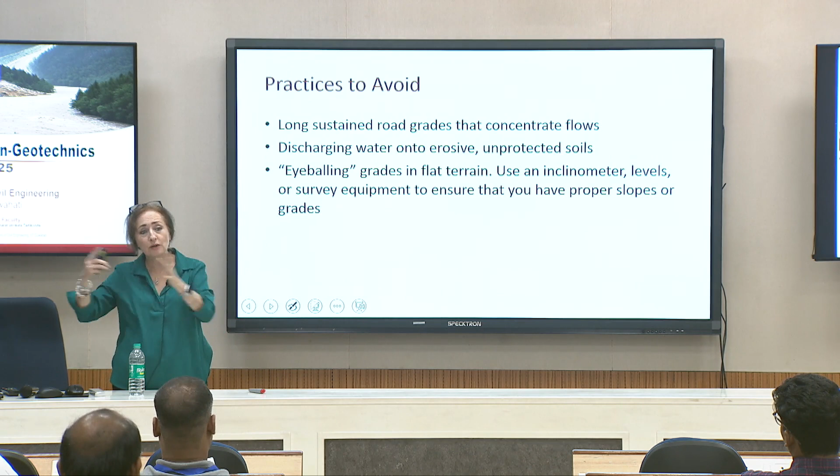Long sustained road grades that concentrate flows are not good. Discharging water onto erosive, unprotected soils is not good.

Eyeballing grading - you see a lot of people send the technician or inspector to the field and say, okay, I want you to figure out that the grades are okay. Instead of taking a proper slope grading with an inclinometer, level, or survey equipment, they just go and say, oh, that's okay. Sometimes it's not okay. So you need to do a good job with the grading.

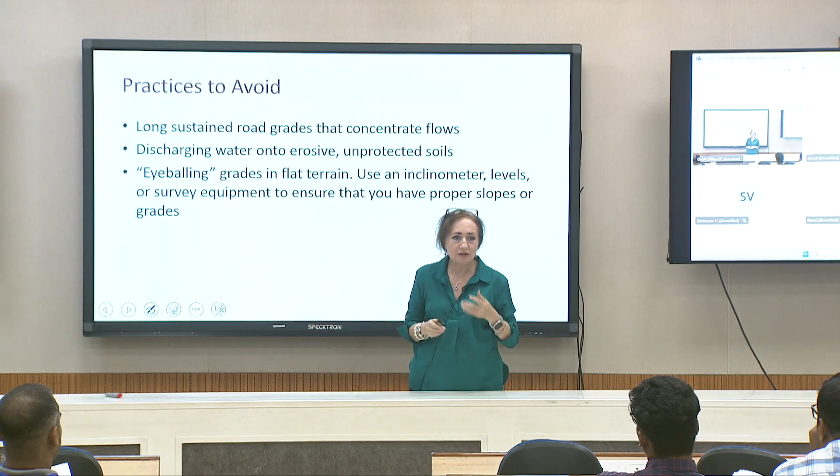Modeling drainage benefit - modeling is very difficult. Drainage is very difficult to put into the model, because you don't know what's going to happen. You can build a model and say, okay, this soil will not get more saturated than this amount, and you can model something like that. But it's very difficult because you don't know where the water is going in the field.

But we can estimate some benefit of putting good drainage in there. Berntsen and Saarenketo got values like, for example, the number of repetitions here as a function of the strain.

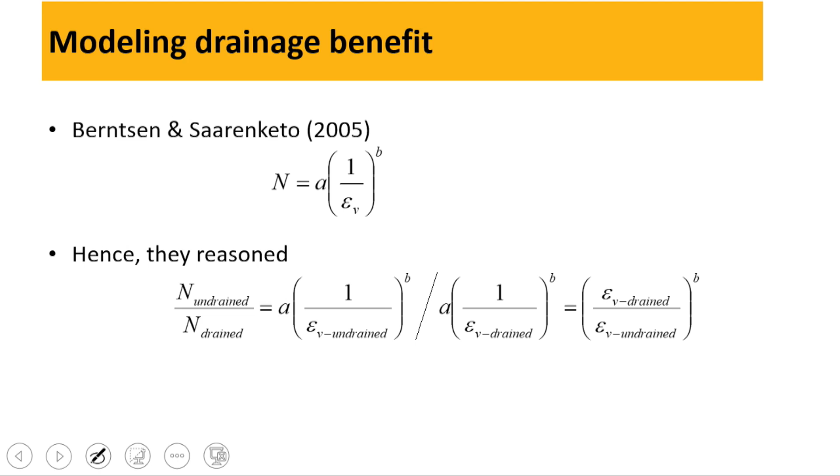If they use that equation, for a soil that is undrained versus one that is drained, they can figure out that this equation shows the strain you get is going to be a function of the ratio, giving you the benefit of having the drainage system.

So maintaining and improving the drainage system is perhaps the most cost-effective measure on roads where inadequate drainage is the main cause of deterioration. That's what you need to pay attention to. Then if you need to get the water in, you now know how to model it and figure out what's going to happen. But the first thing you need to know is to avoid the water in the first place.

All right, you guys have any questions? Very general, I wish I had more time, but I hope I gave you good questions for lunch. Yes? Hi, Prof, thanks for the great lecture.

So I would like to ask, as you mentioned about environmental loading conditions, including pavement soil mechanics, how can we consider the effect of the freeze-thaw cycle for calculating the resilient modulus? Through this equation we have not considered any effect of including the water, meaning including the ice or something in that way. Can you explain about that?